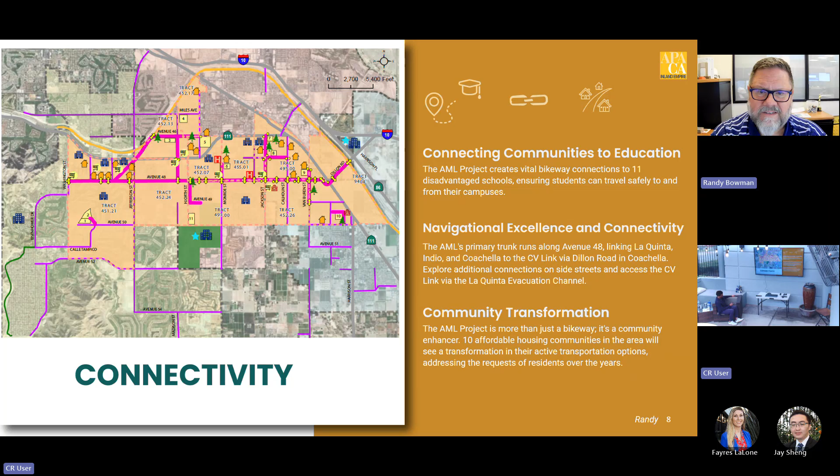It's all based on a vision. Our executive director, he's been at CVAG for quite some time. Tom has just a great vision for not only the CV Link, but also these community connectors such as the Arts and Music Line. And he's been very clear all along. He doesn't expect these to be your typical multi-use paths. He wants them to help celebrate the Coachella Valley, our vibrancy, our history, our culture, and we think that we're advancing that even with the Arts and Music Line project. Next slide.

And then lastly, I'll just wrap it up. A lot of engagement and outreach has been conducted for the Arts and Music Line project, and more is coming. Just something as simple as introducing a bicycle signal along the main corridor of the project. We don't want people to be surprised. We want people to know what those mean, how to use them, take advantage of them, frankly, and get out there and ride safe and be safe.

And also the motorists. What the heck is a bicycle signal, and how do I have to follow it and abide by it? That is something that is important. So not only during the planning and design, but also helping to prepare the public with new features, and also keeping them engaged during construction, because no one likes to be slowed down on their commute to get into work or be inconvenienced. But construction does disturb things, and this project is going to be disruptive. But we want to certainly keep the community engaged as the construction proceeds.

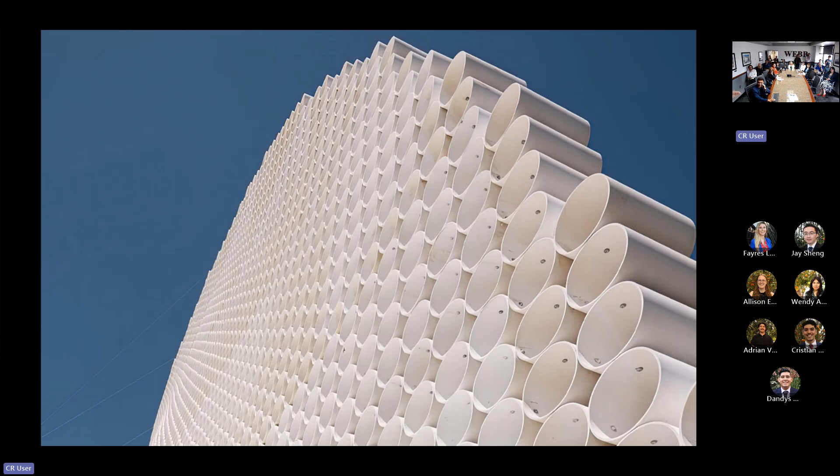I had Dolby 57.0. I had 57 addressable channels to work with in this piece, in collaboration with L Acoustics, and it was absolutely mind-blowing. Beyond words, I can't explain it, but it was great. Moving along. As we see, the PVC had this tapering, and so there was actually 12 feet down to 18 inches in the taper of the PVC.

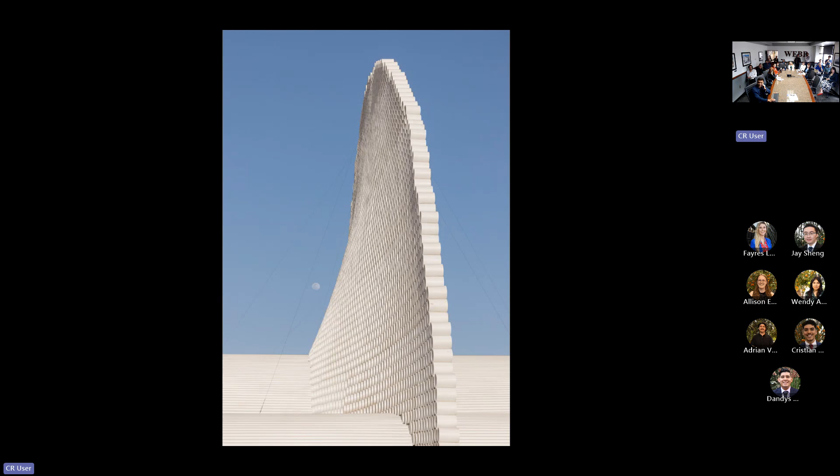So this idea of the video that was projected, of course, being my video art, but I never had the same thing again. It was always something new. So every single moment in the night, it's completely different. Once that time passed, it would never be the same.

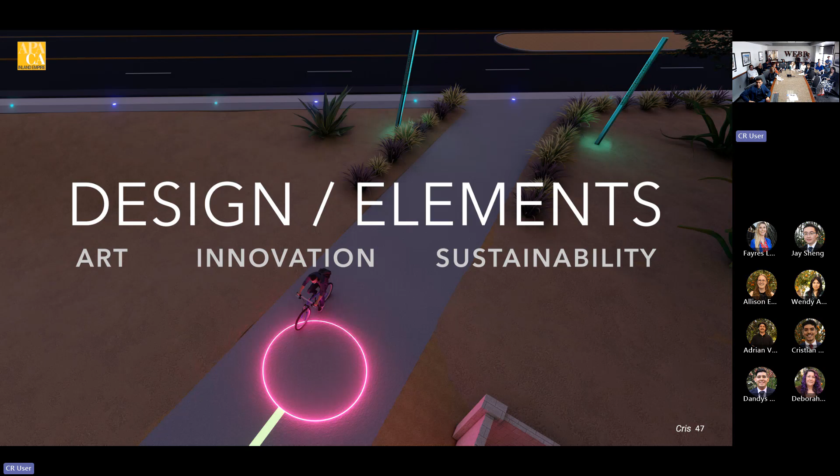And these were kind of the foundation elements that I wanted to make sure were involved with the design of the project, okay? And so these are the concrete designs that are being implemented and kind of marking specific areas that are more kind of like major intersections and different kind of elements that kind of harness the path.

So, for example, this sliver arc, can't pronounce my own terminology here, but the sliver arc is just every so often. It's maybe every 40 feet, and so I'm still on that path. So instead of doing a colored concrete all throughout, maybe in like a longer stretch, or even going away from the conventional stripe, I go, can we do something other than just striping the road? Can I have one color, two colors, and in the various lanes?

Oh yeah, we could do that. Okay, cool. And then, okay, we can't do that all throughout. How many miles is it altogether? It's like 10. It's like a 10 plus. It's like, okay, maybe 2 miles you can do colored treatments, but 10 miles is a lot of Portland concrete, right? And so in the mix of the concrete, every so often you're seeing these little swatches, these little swooshes of design, and you go, oh, I'm still on the path.

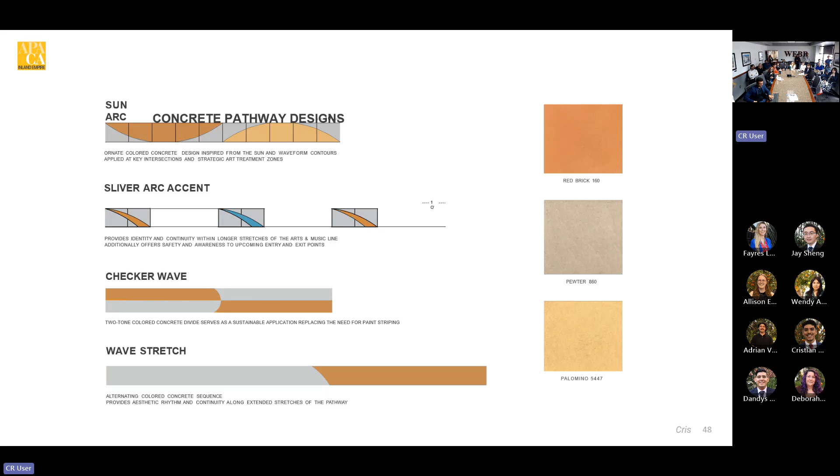Going along, these are a completely custom design that we've been working with the design over, yeah, it's been about 4 years in the making on this one, and we finally just got the prototypes in, and they look phenomenal. And so, yeah, these kind of sphere bollards, we have a concrete, and then we have this lensing, and the lensing with the LED lights is going to be addressable.

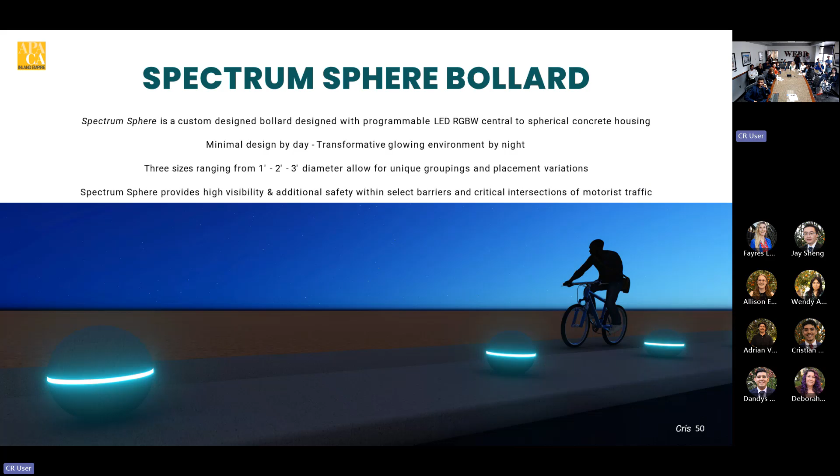So we can do a lot of interactive kind of choreographies along the pathway. Next, please. Yeah, and so we have the placement here, and so they can go into the magenta, into the cyan, but not only that, they can start chasing around the sphere. There can be a lot of different choreographies to this, and so part 2 of this is really to collaborate with the lighting designer and make sure that there's these kind of very organic scenes.

We don't want flash and trash, you know, and there's a kind of a specific palette that I have in mind, even for different cities. It's like, oh, I'm in La Quinta now. Oh, I'm in Indio now. Here, I'm in Coachella. Moving along.

And then once again, just the idea, instead of just having the striped divide in the 2-lane bike path, we can just have a darker concrete and then a lighter concrete. And it's just so much more minimal. And we can also put these inset LED lights as well, which will be in areas where people need to really take note. Okay, there's a big intersection coming up. I got to slow down.

Obviously, the visibility of the biker as well, the safety of the biker as well. In the desert, we need the safety for the biker. There's just a lot of, okay, press your luck, ride your bike. There's no bike lane. So this is going to not only provide safety to bikers, provide more exercise for the community, but I think it connects to about 26 schools altogether between the CV Link and the Arts and Music line. Go ahead.

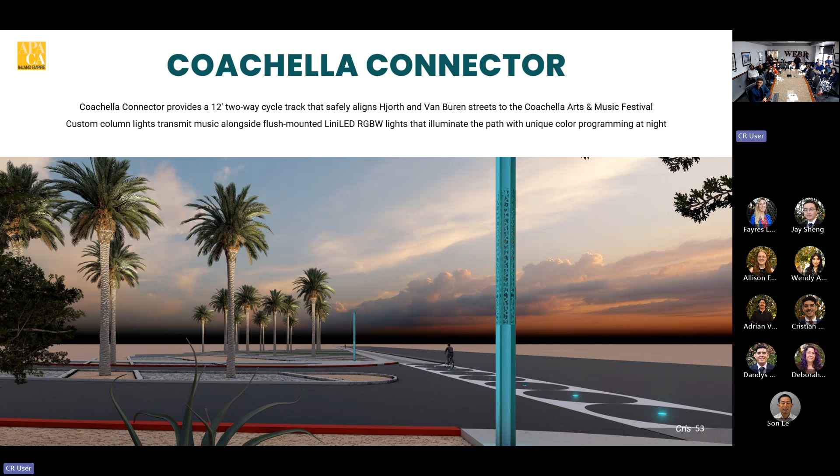This is just another one of the visual renders that I've created for the park that's in the city of Coachella. And what I do is I take a drone photo, and then I place in the computer graphics and try to get it as realistic as possible to what the reality is going to look like. Yeah, so these are all renders that are coming from my studio.

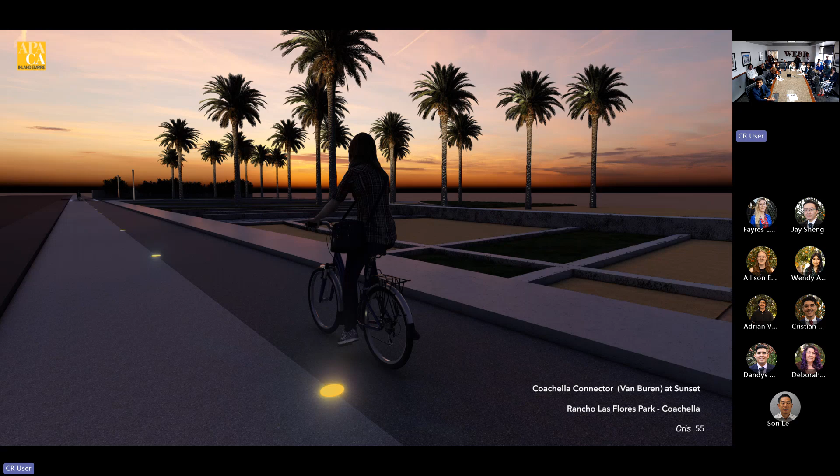Okay, and then once again, just kind of connecting into Coachella. Right now, there's no bike lane whatsoever connecting to this park. People are driving ridiculous speeds. This is going to save lives. Okay, and then this is like the highlight of the path in a way. It's just like the beginning of it.

So on the edge of La Quinta and Indio, we have this channel. We have this wash that people will be greeted with music playing out of these columns here. And so the hope is that we can collaborate with Coachella, or we'll figure out Spotify or Pandora or whatever. We want to curate this audio. We can even monetize it. It can be like a student project.

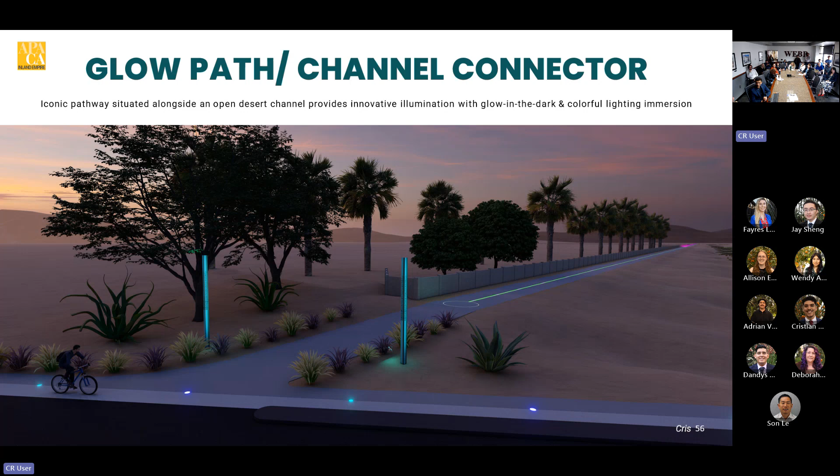I don't know, but the idea is to have curated music playing through this, and especially during Coachella Festival, Stagecoach, we can have the different themes. There's going to be thousands upon thousands of bikers coming in during those festivals, which is going to really help mitigate the traffic, because otherwise you're relying on Uber or driving, and now it's like, oh, I'm going to ride that bike path right there.

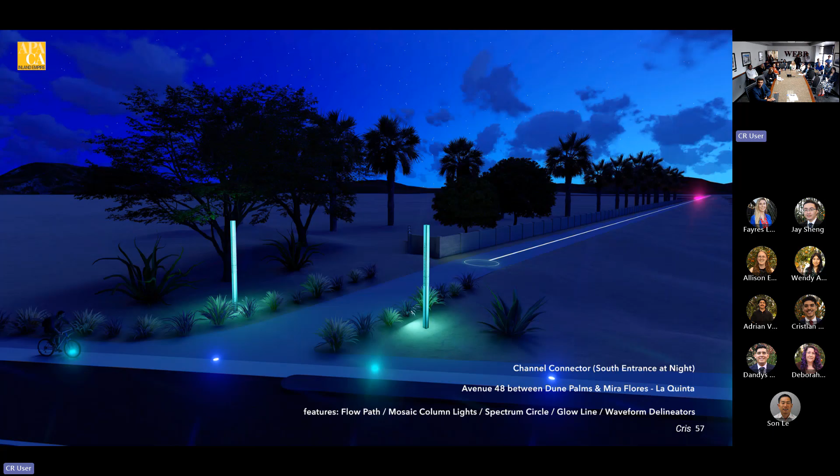So going along, this is the night, and going along, we start to see this line here. This is a glow-in-the-dark line. And so this line will be activated, of course, with the sunlight and be glowing all night long. And then we have this circle here, which is an inset LED light, which will be a similar technology to the sphere bollards that I was showing you earlier. Moving along.

Yeah, it's a good 1.5-mile span. So actually this is a previous render, but it'll start with the circle, and then at the end of the 1.5-mile span that goes through the channel, goes under a bridge, it'll end with another circle. So it's full circle. Okay, to the next. Yeah, there we go. That's a more specific render.

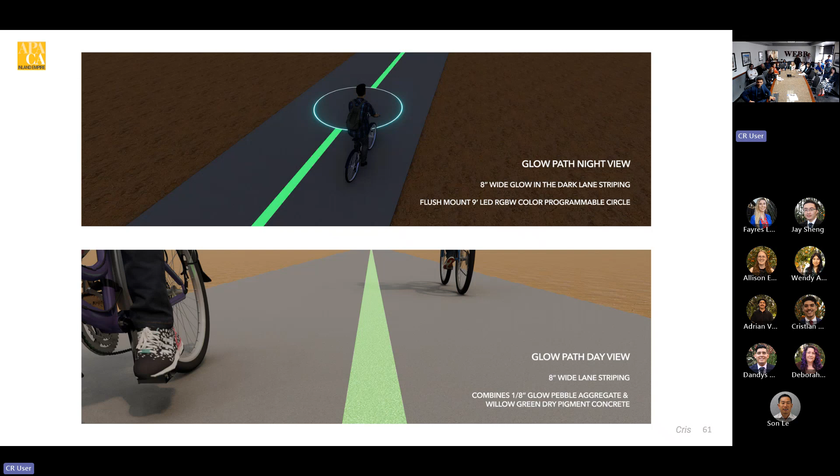The aggregate has this kind of mint look to it, and so it's like, how can we make it look not so choppy in the daytime? And so the idea is to really just make that line an analogous color to the aggregate, so it just looks very uniform in the daytime. Going along, these we had them, and now they might be gone, but we're going to figure them out.

These are amazing columns that can coordinate and sync and have this whole DMX chase scene happening, and to even stagger them at certain heights, so it kind of has a mountain range flow, right? So a 12 foot, a 14 foot, a 16 foot, 18, 20, so on. And then, yeah, this I think would just be really, really iconic. So it was going to be positioned in 2 places, and now currently it's not going to be positioned anywhere, but we're going to get it back and figure out somehow.

Okay, next. And then so aside from having this kind of day to night transition and this experience where you really just want to get on your bike and not only ride the path and have this safety, but you're experiencing something that's really kind of like a sculpture park in a way. Not all of it, but there are those little pockets where it's like, oh, this is really nice. This is pretty iconic here, right?

And so what I've done is laid out the different areas throughout La Quinta, Indio, and Coachella where I feel would be really great areas for more public art. They already all have their really robust public arts programs, but thinking of this as kind of a generational template, it's like, okay, this doesn't need to happen the next year, next 5 years, but down the road, this bike path is designed with sustainability. So this is going to be up for the foreseeable, long term of it. And so the idea of having these sculptures, I think, would be phenomenal.

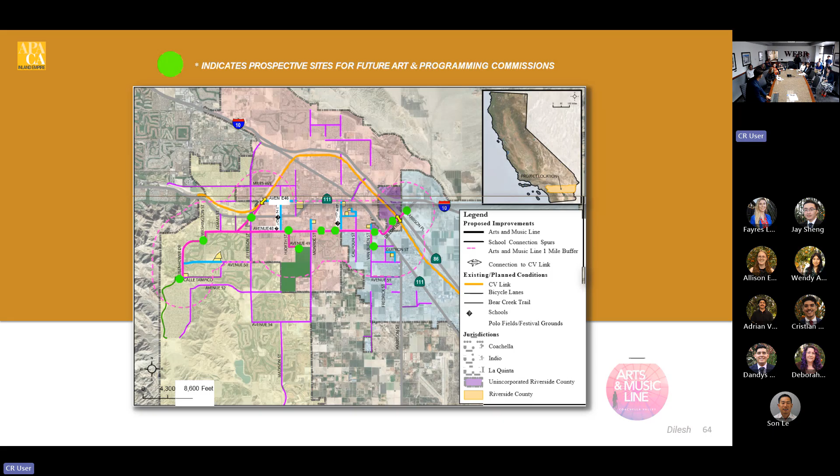You guys, I know we're running maybe a little bit late because of our rain issue, but last but not least, I wanted to introduce Dilesh. He's our Director of Traffic and Transportation. Dilesh has always had a passion for traffic and transportation, whether planning circulation for communities or designing highways that connect people. With over 30 years of experience, he has led multidisciplinary projects for cities, agencies, and public and private clients, including complete streets, roundabouts, bridges, bikeways, and pedestrian facilities. His work is deeply rewarding because it helps build safer, more connected, and vibrant communities. Dilesh is committed to designing context-sensitive solutions that integrate all modes of transportation and improve how people move through their cities. Dilesh, thank you.

It's hard to go after Cris, I know. It's like engineers go after that. It's like, oh, let's make it. We'll make it like, instead of colorful, make it gray.

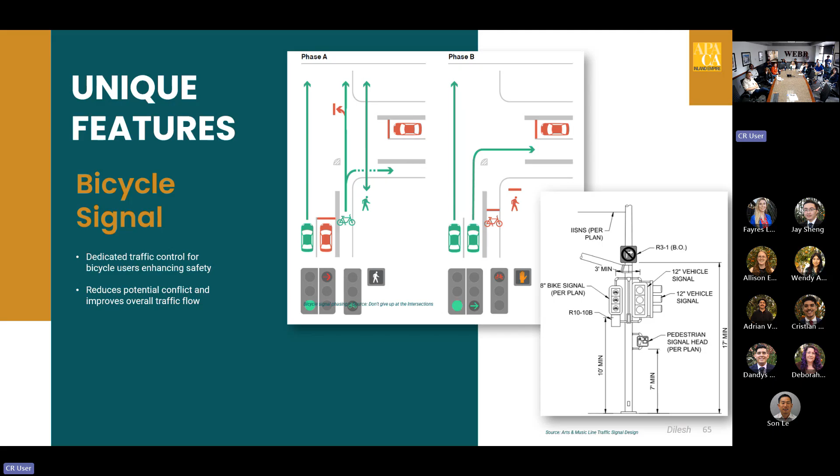So I just want to go over some of the engineering part of this project and some of the unique features we have. So, bicycle signals. All the traffic signals within the project boundary are going to have bicycle signals. They'll provide a separate phasing for the bicycle, so people won't be able to make a right turn, because that's where the conflict happens. So we are installing bicycle signals to reduce the conflict and increase the safety. Sure.

So some of the unique features is like, typically when the bike lane is designed, they really pay attention to in between the blocks, but at the intersection they give away, and then they mix the bicycle with the regular traffic. That's where the majority of collisions happen, right? So we should not give up at the intersection. So as you can see here, this path is a two-way path on the north side of Avenue 48. The majority of the path is a two-way path on the north side of Avenue 48 that goes from La Quinta, Indio to Coachella.

So what we have done, we pushed the path back. So then if somebody's making a turn here, they're able to stop and yield to the bicycle as well. So we want to make sure that it makes the intersection safer as well. Plus, the pedestrian and bicycle crossings are at the same level as the sidewalk. So it's going to be a little table. So all the vehicles have to slow down to go up and around that. So we're making it much safer for the bicycle and pedestrian.

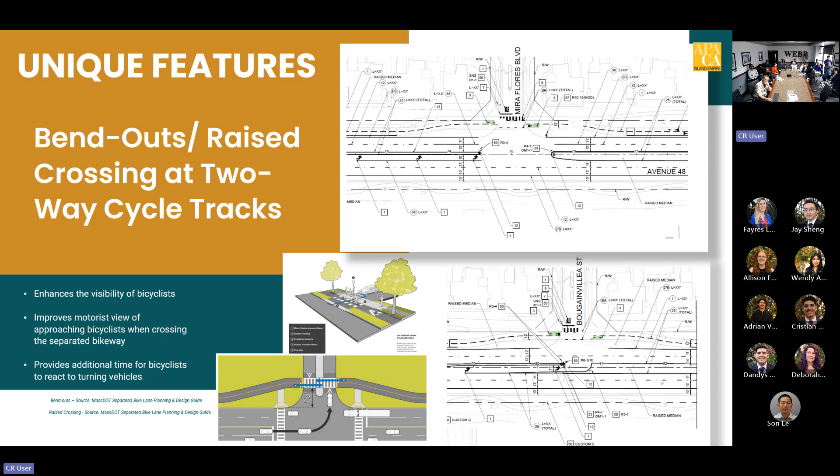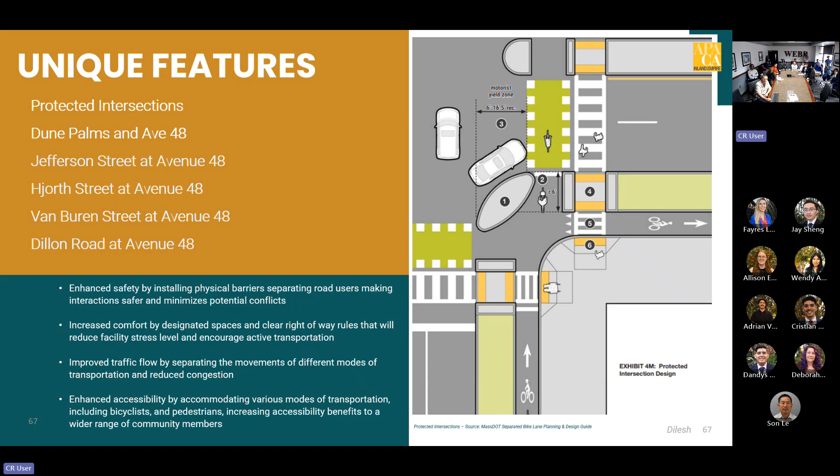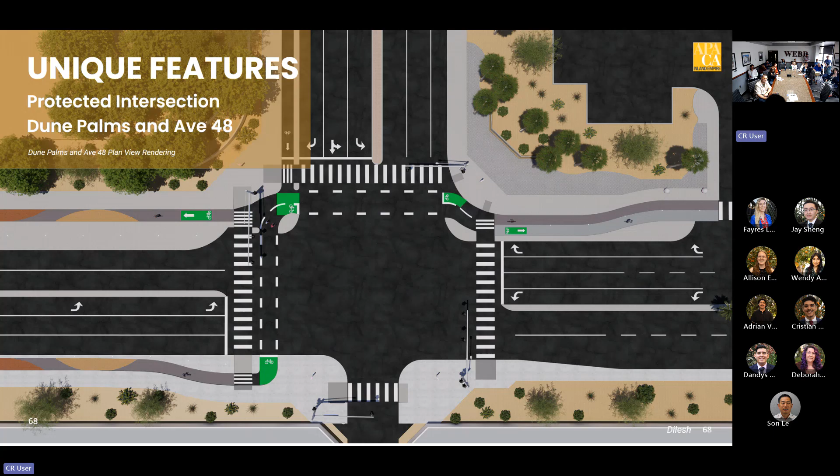So this is one of Christopher's renderings. This is what it would look like at one of the intersections at Dune Palms and Avenue 48. This is where we have a two-way path that becomes a one-way path on the north side that Christopher was talking about, the different colors and the lights in the pavement versus the sun arc and some of the artwork here. Next slide. This is what it would look like in the nighttime with the lights.

So CVAG really set a high goal for us regarding this project, and they just want to make sure the project looks unique, not just a typical project that we would do. And Christopher has done a great job. Plus, we have on our team a good electrical engineer out of San Diego, Visual Concept, amazing guys. So whatever Christopher came up with, they made it happen. They did so much work with the manufacturers to get the lights really built, customized.

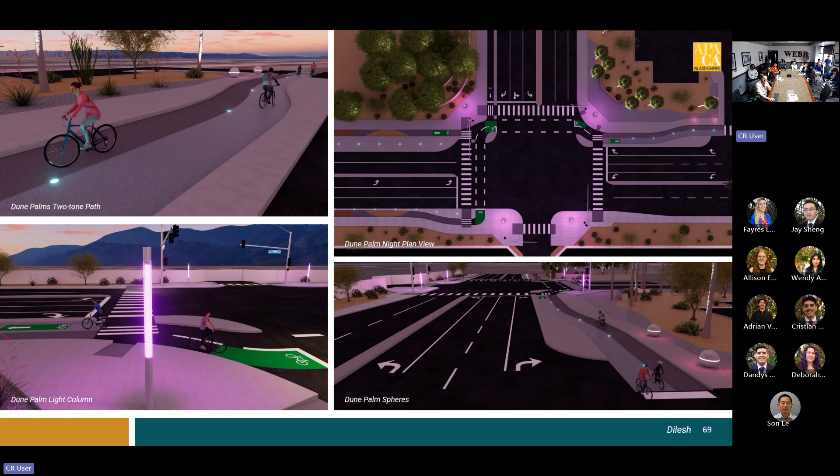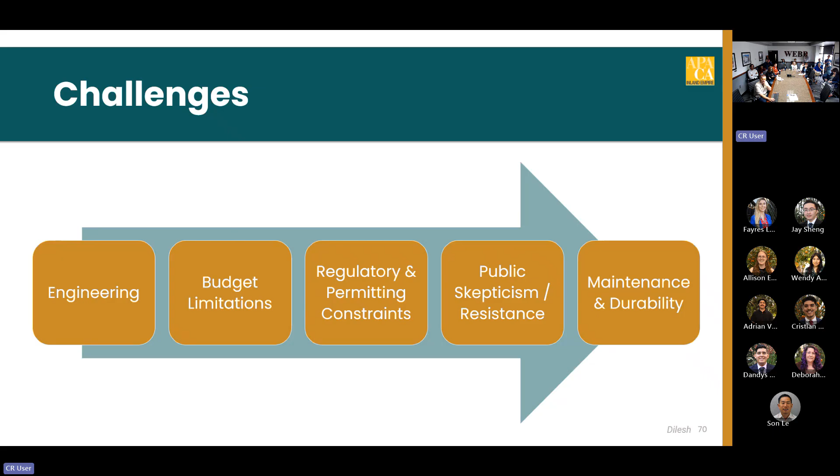Next slide. So some of the challenges with this project: engineering challenges, budget, regulatory, public skepticism, maintenance, durability. So I'll just go briefly over some of those challenges. This is the one that Christopher was talking about, those two circles at the end. This path starts at Avenue 48 and connects to CV Link to the north, about 1.5 miles. It crosses two bridges, Jefferson and Highway 111. This is Indio and La Quinta on that side.

And this right-of-way belongs to Coachella Valley Water District. They really didn't want us to go under the bridges because of safety reasons, because if this channel gets flooded, it's a valid concern, right? In case there is water in the channel, it could be a safety issue and they take the liability for it. So they set a high bar for us: you have to keep the 100-year flow out of this path.

So this is the channel cross section you see right here, and we are encroaching into that. So we're reducing the capacity, and the water level will go higher. It rises about 1 foot. Luckily, the channel has enough capacity. The 100-year flow is about 4,000 CFS, but channel capacity is about 7,000. So there is enough capacity, we just have to make it work. So we had to propose the retaining wall and the wall on top of it to keep the water out.

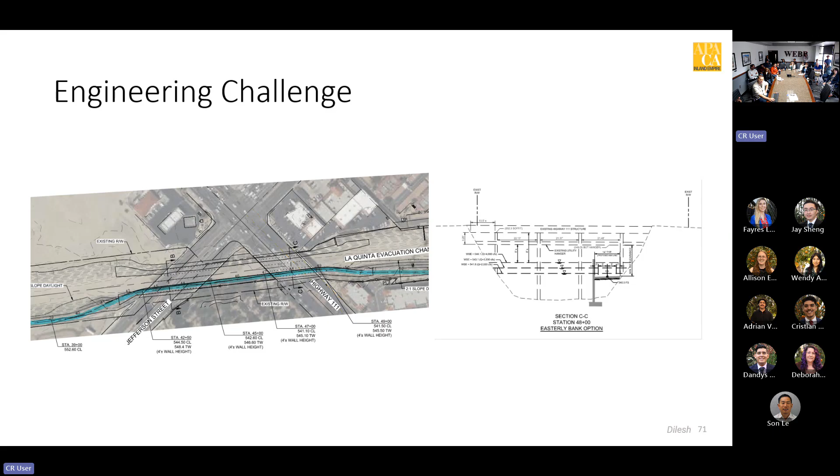And so we worked with Christopher, and we had to really sell it not just to CVWD, but the local safety officers, like police and fire. We met with them, got their input, and made sure they bought off on that, because safety is a big issue everywhere, especially when you go under the two bridges, and when you cross these bridges diagonally, it's longer spans, so it gets dark. So here are some of the things we've done to convince people and show what it's going to look like. Next slide. I'll just play a quick video.

So this is you going north, and you're going to go under the bridges. These are some of the lights that Christopher came up with that we're implementing along the project. CVAG does not want to treat this as out of the way. They want to make sure it still looks good, like one project, not just give up and do nothing with it. This is a glow-in-the-dark stripe as well. And now we're going to go under the bridge. This is a safety phone, so you can call for safety, as you can see down here in the bridge.

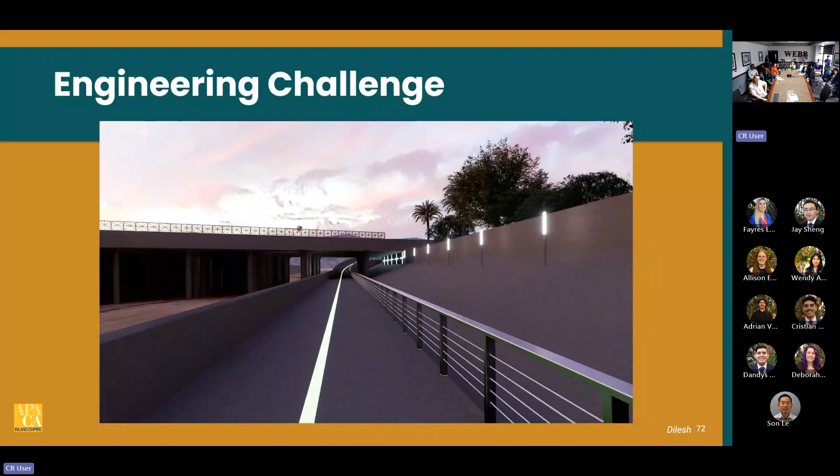So if it's the 100-year flow, the water is going to be about a foot lower than the top of the wall. There's going to be some water coming in here during the flow, but when the water recedes, we're going to have a little outlet that will get the water out. So as you can see, this is what it's going to look like when it's done. Next slide.

So next thing is some of the Circleform crosswalk that we had proposed, but then, because of regulatory constraints, we cannot have lights in the crosswalks. The MUTCD doesn't allow it, right? So we kind of had to work around it. Plus we have bicycle symbols and other things.

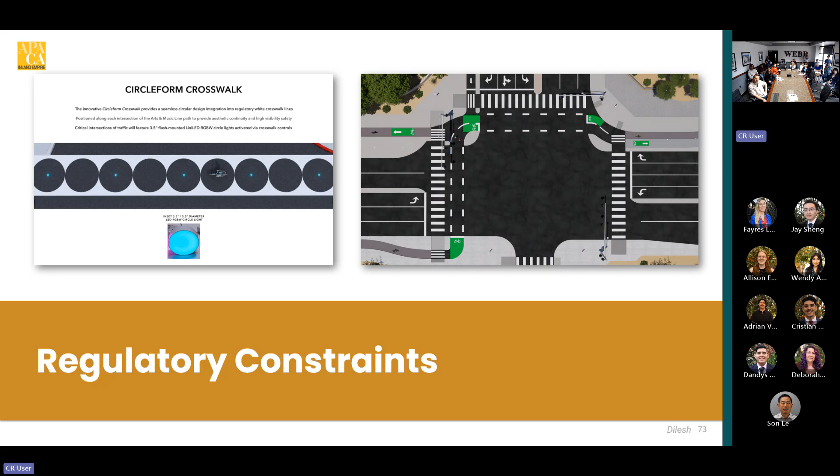So we could have made it work, like Randy was mentioning, as long as we kept 12 inches on the outside, you can do whatever inside. But then we completely dropped that idea and just went with the traditional here, but we focused on away from the intersection. So sometimes you have a great idea, but maybe dial it down because of regulatory constraints.

This is a federally funded project, so it has the Build America, Buy America Act. And especially all these LED lights are mainly made in China, right? So it takes so much effort to really find local manufacturers. Some of them actually have to make them here. So our electrical sub-consultant really worked closely with the manufacturer to make all the units you will see on this project. So it's going to meet the Buy America, Build America requirements.

The total budget of the project, we started with like $50 million. It's now about $80 million. Cost has gone up, plus scope has gone up as well. So about $36 million is funded by federal grants, the rest is going to be local, and there are some other grants CVAG is applying for as well.

As far as the art, it's about $10 million. So you can see how much artwork is going to be involved. Usually in some projects art is an afterthought, not included, and has lower budgets, but this one is a very art-focused budget. So as you can see, we are spending over $10 million on art.

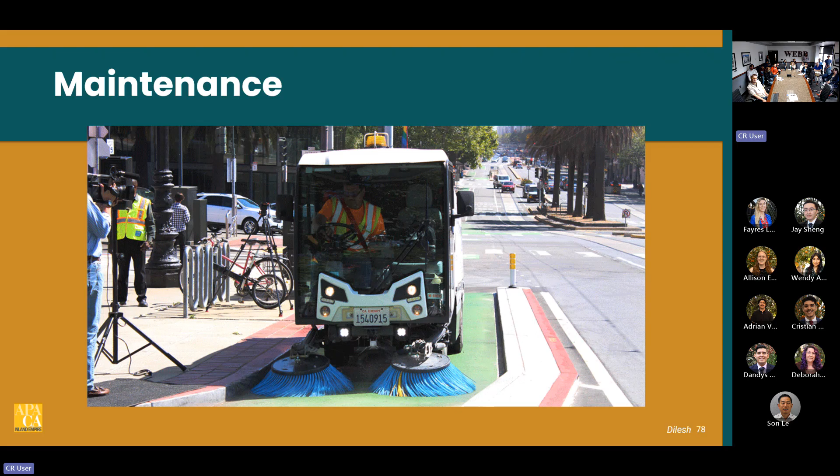The takeaway: have the art conversation at project inception, right? So talk art not afterwards, but at the beginning of the project. Treat art as a part of the design system. As you can see, this art is part of the design. It's not an afterthought. And some of the other things: engage communities, be pragmatic, whatever the budget you have.

And other things like durability. We really focused on durability and life cycle for these products, because Coachella Valley gets pretty hot and there's a lot of sun. So Christopher and everybody really paid attention to make sure it will stand up for years in that environment as well. So with that, Christopher and I are here for any questions you might have.

I believe this project crosses multiple jurisdictions, right? Yeah, that is correct. How did you or CVAG initiate the conversation between the different cities? And as far as maintenance goes, there's a lot of lighting. Are the cities in agreement that if a light bulb goes out, they'll take responsibility for covering the repair? How did you navigate the initial conversation, and the conversation once it's under construction and maintenance of the art mile?